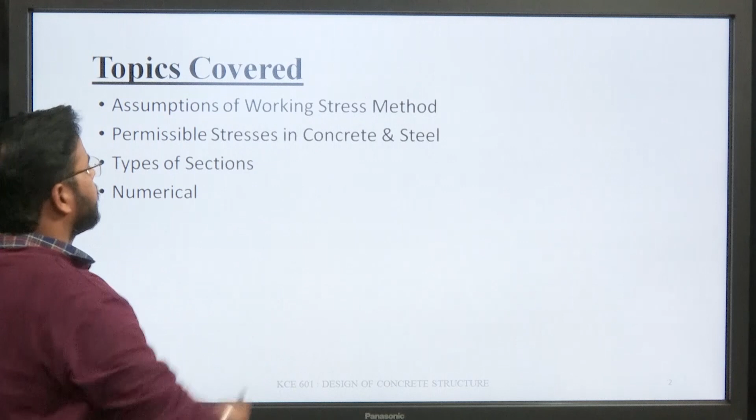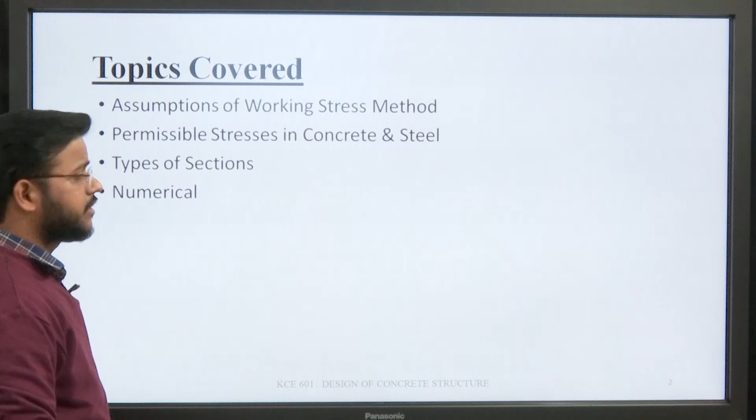In this lecture we are going to cover different assumptions of working stress method, the different permissible values taken for concrete and steel in this design philosophy, the different sections, and then a numerical question related to the analysis of this method.

So the first thing is the different assumptions, or say the rules, related to this design philosophy. This is mentioned in IS code 456 2000, Annexure B.

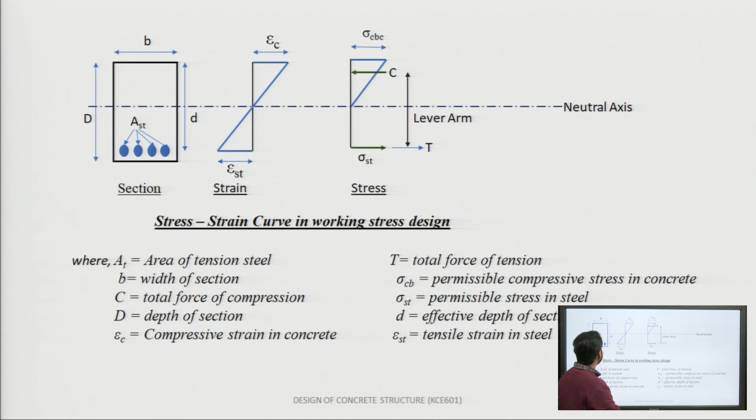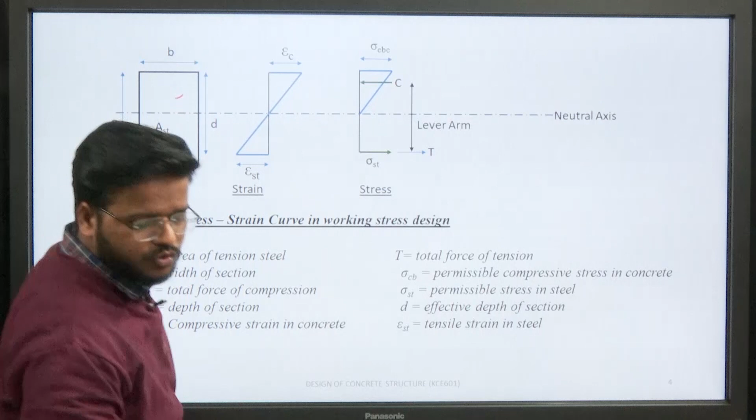The first very important assumption is that a section which is plane before bending remains plane after bending. Let us take a cross section where the width is B and the total depth is D. There is a neutral axis which differentiates the tension zone and compressive zone when a uniformly distributed load is applied on a simply supported beam. The upper part is the compressive zone and the part below the neutral axis is the tension zone.

So basically it means that the strain increases as we go farther from the neutral axis. As we can see from the strain diagram, as we go farther from the neutral axis, the value of strain increases proportionally.

The second very important assumption in working stress method is that the bond between steel and concrete is perfect within the elastic limit of steel, meaning they share the strain value equally.

Now the third important assumption: as you can see from this cross section, there is concrete below the tensile zone also. So the third important assumption is that the tensile strength of concrete is ignored, meaning the concrete will not share any tensile strength below the neutral axis.

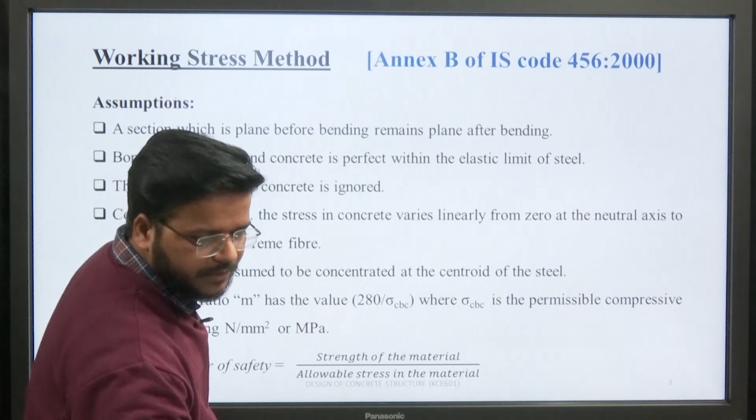The fourth very important assumption is that concrete is elastic, meaning the stress in concrete varies linearly from zero at the neutral axis to a maximum at the extreme fiber. You can see from this figure that the stress directly increases from the neutral axis to its maximum value as we go further to the extreme fiber.

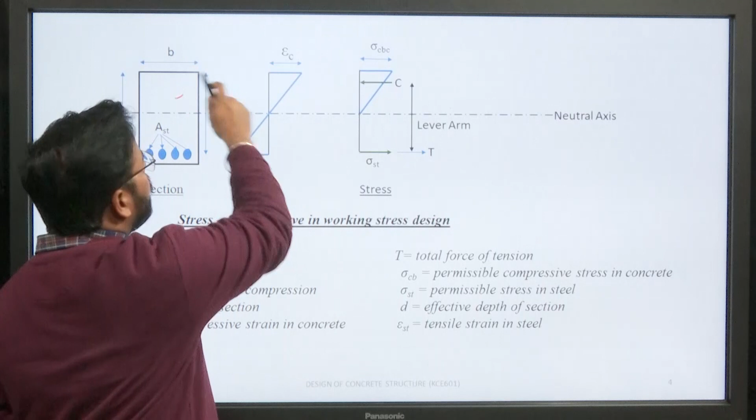So at the extreme fiber the stress in concrete is found, which is equal to sigma CBC. What is sigma CBC? We will discuss that further.

The next assumption is that steel area is assumed to be concentrated at the centroid of the steel. As you can see, the steel section is concentrated, and the stress in this steel is concentrated at the centroid of the steel, that is T. The stress sigma ST is basically at the centroid of the steel.

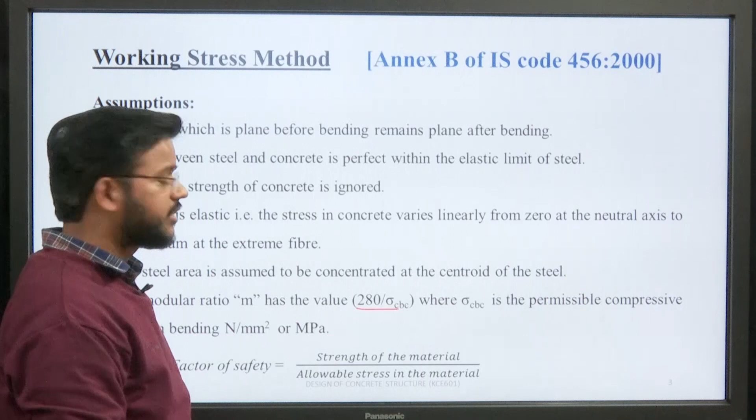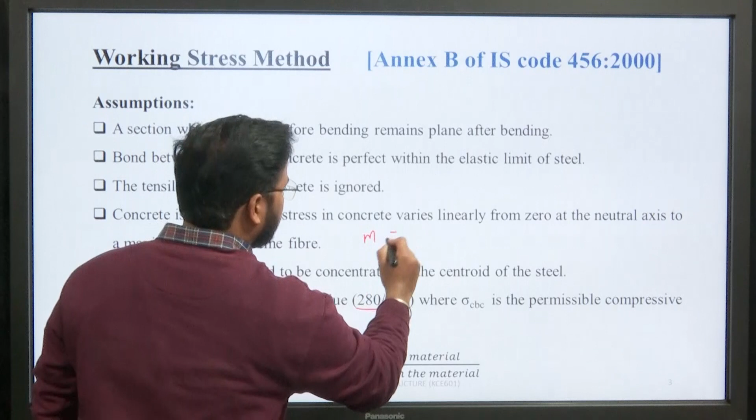And the last assumption taken in this method is that the modular ratio has a value equal to 280 upon sigma CBC, where sigma CBC is the permissible compressive stress in bending in Newton per mm square. Basically the modular ratio is defined as the ratio of the modulus of elasticity of steel to the modulus of elasticity of concrete, meaning M equals ES upon EC.

ES means modulus of elasticity of steel, and its ratio with modulus of elasticity of concrete gives the modular ratio. But as per IS code, the modular ratio is not taken equal to ES by EC; instead it is taken equal to 280 upon 3 sigma CBC.

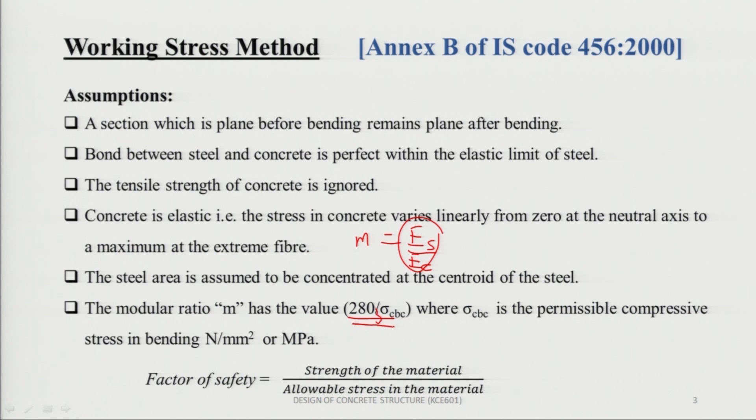So why is this value taken? Because it incorporates the creep effect. The simple ES/EC ratio does not involve the creep effect, whereas this value incorporates the effect of creep.

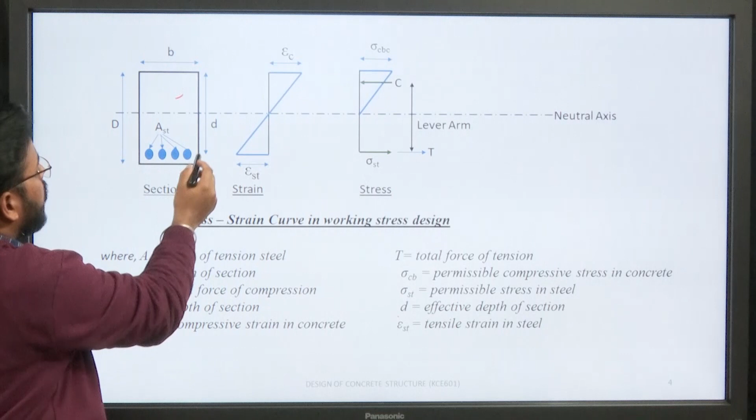So, we already discussed this cross section of a reinforced concrete structure, this is steel, this is the width of the beam and this is total depth. Now the most important term is this d, which is basically called

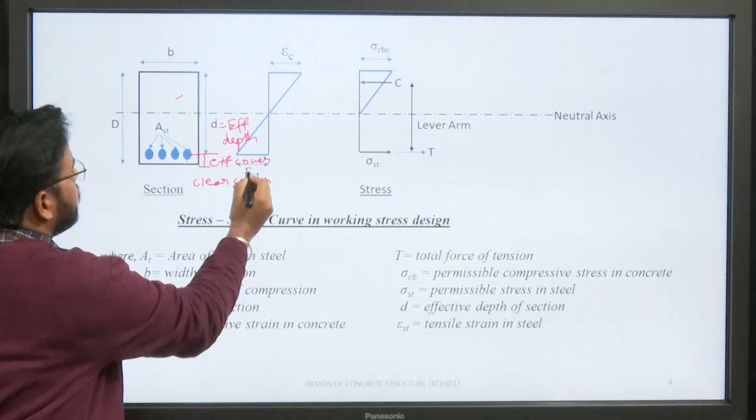effective depth. What is effective depth? The distance from the centroid of the steel to the extreme tension fiber is basically known as effective cover, which is provided, and the distance from the last point of the steel to the last extreme fiber is basically called clear cover. So when we subtract the value of effective cover from capital D, meaning total depth of the cross section of the reinforced concrete structure, then we get the value of small d, which is also known as

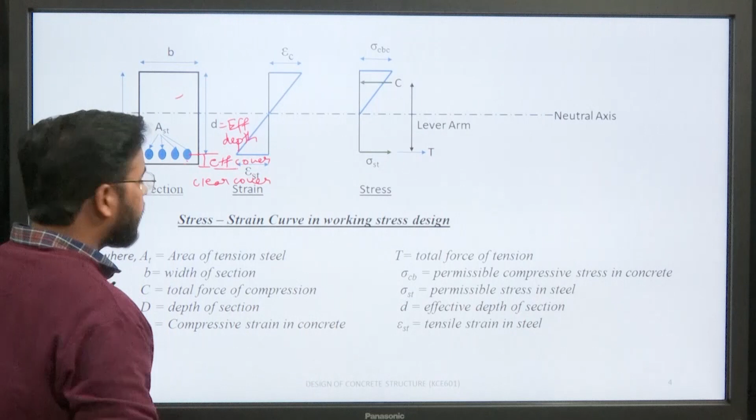effective depth. So we already discussed this strain curve and stress curve from the assumption.

Now what is the permissible stress which concrete will take while it is in tension. It is mentioned in clause B 2.1.1 of IS code 456/2000 that for different grades of concrete, as we discussed in the previous lecture, the permissible tensile strength is given. Like for M10 grade of concrete, the permissible tensile strength is 1.2.

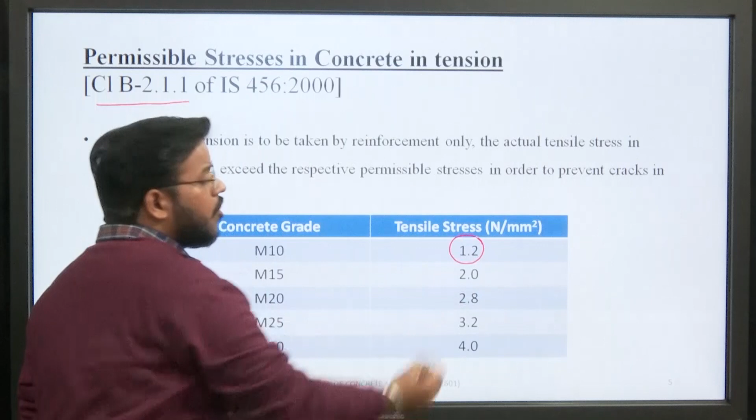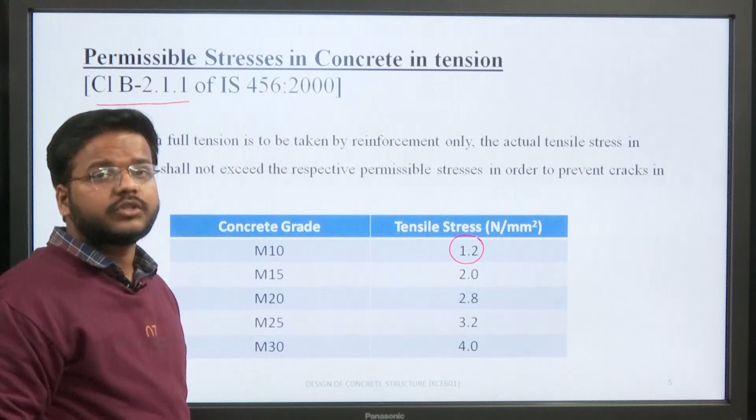Although it is mentioned that concrete will not take any type of tensile stress, in general some tension is always present. So it should not happen that a crack develops, because concrete is very weak in tension and very strong in compression. If tensile strength exceeds this value, there may be a possibility that a crack is generated at that place. So this value is given so that the tensile stress in concrete should not exceed these values for different grades of concrete.

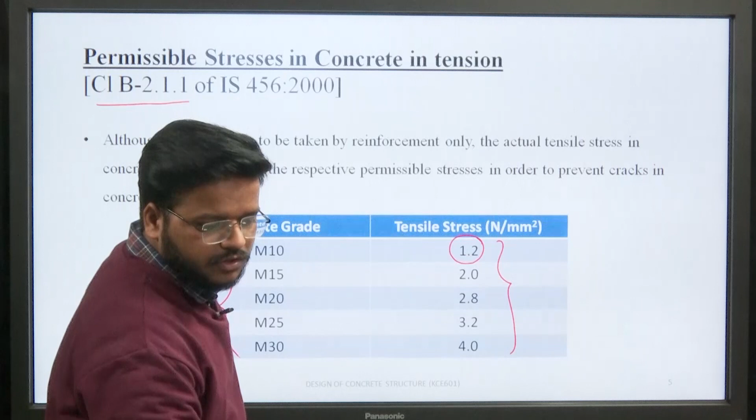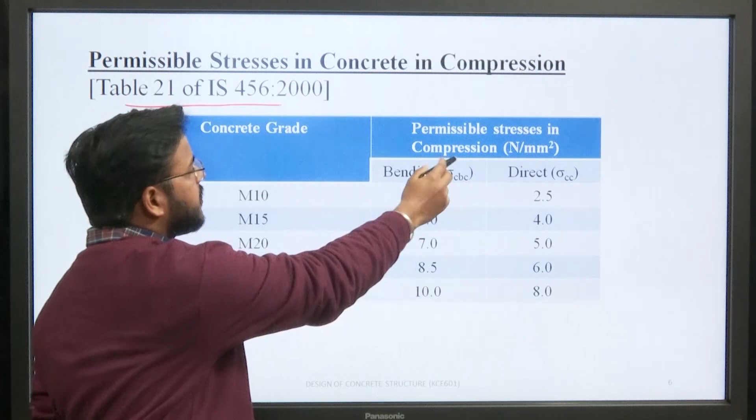Now the permissible stress in concrete in compression is also mentioned in table 21 of IS code 456/2000. For different grades of concrete, you can see the permissible stresses in compression. So when the concrete structure is in compression, there are two types of loading seen: the first one is bending and the second one is direct.

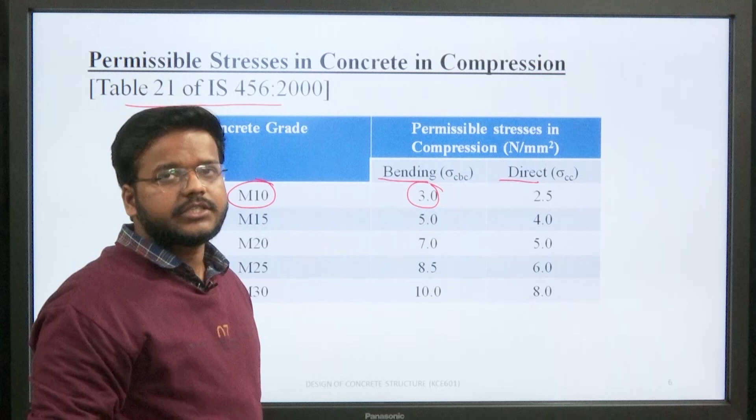Bending stress is represented as sigma CBC and direct stress is represented as sigma CC. So for M10 grade, the permissible bending stress in concrete in compression is equal to 3 Newton per mm square, while for direct stress its value is 2.5.

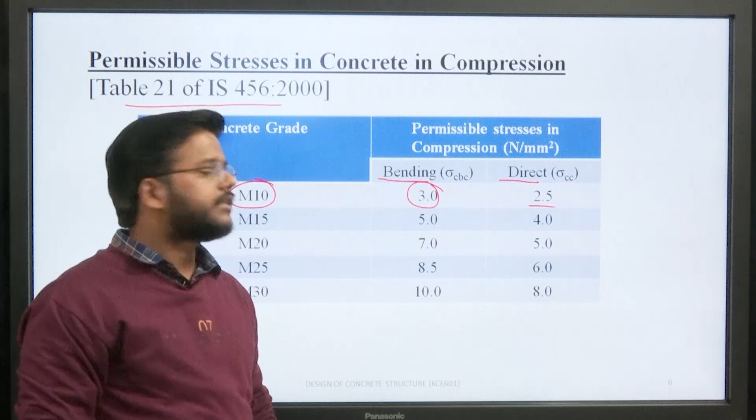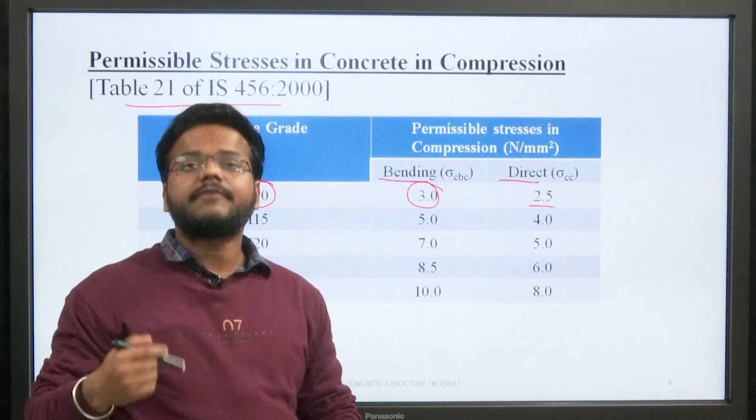You can see that the permissible stress in direct loading is basically low compared to bending, because when you apply direct force, it becomes more weak. So this value is basically low when compared to the bending.

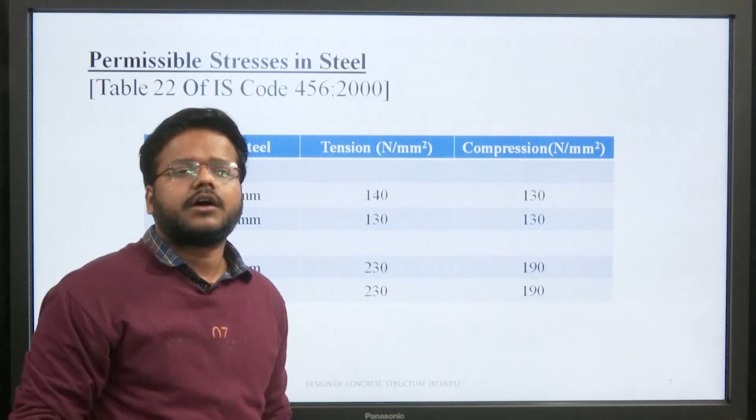So till now we have discussed the permissible stresses in concrete, in compression and in tension. Now we discuss the permissible stresses in steel. It is taken from table 22 of IS code 456/2000, showing what are the permissible stresses in steel.

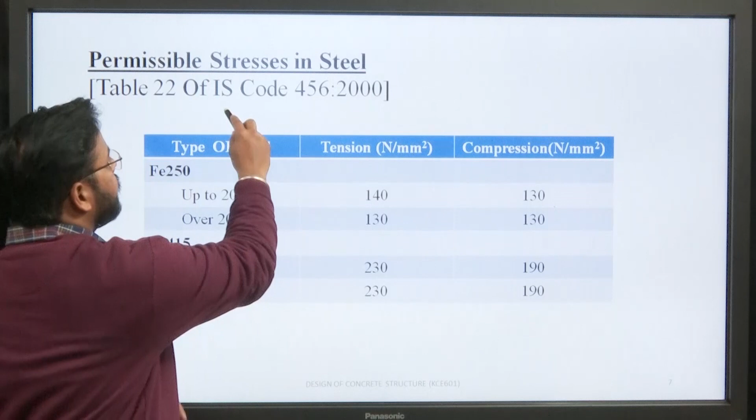So for different grades of steel up to different dia, like up to 20 mm dia bar, we can take the permissible stress in tension as equal to 140 Newton per mm square, and for 415 grade of steel up to 20 mm, this value equals 230 Newton per mm square.

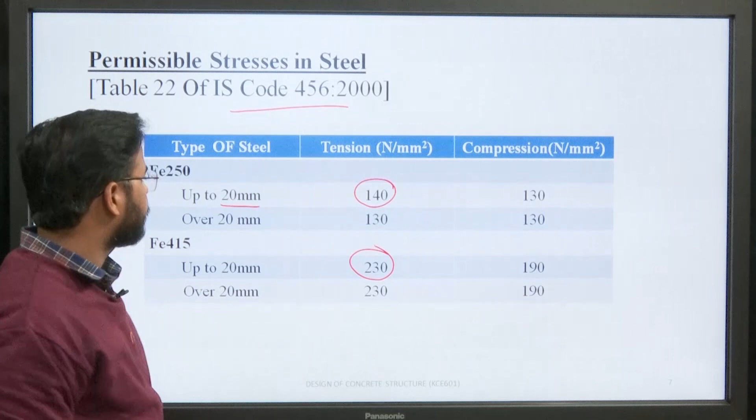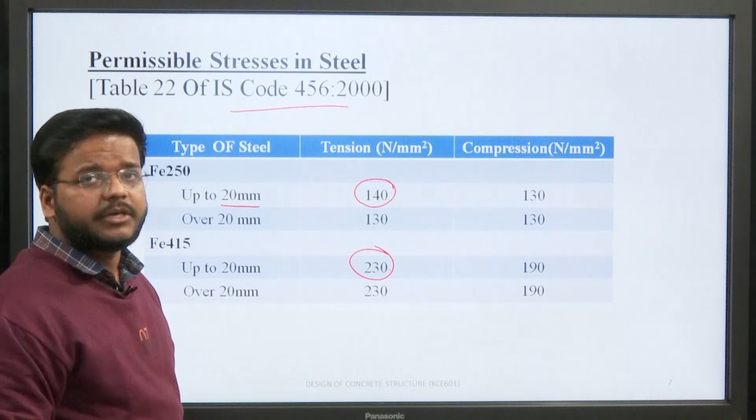These are also important values, but for your subject reference, these two values are very much important, so remember this. Generally these basic values are also mentioned in questions, but you should also remember these values.

Now the modular ratio is a very important term, which is basically used during analysis of reinforced concrete structure in the working stress method.

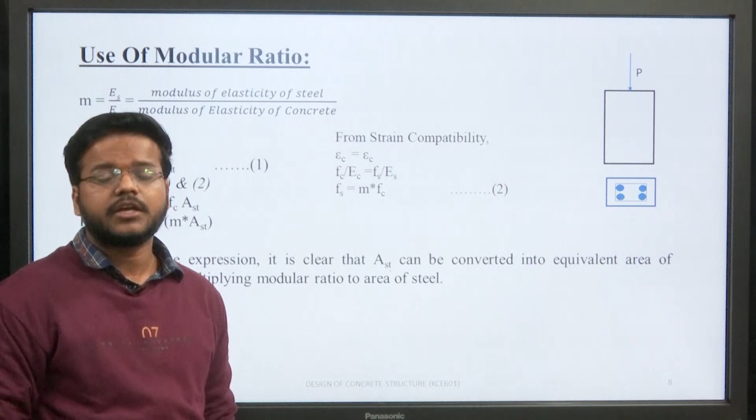So you can see a section where a load P is applied. This load is basically borne by both the concrete and steel. We can write the load as stress into area of concrete, plus stress in steel into area of steel. So this is one section.

From strain compatibility, you know that εs is equal to εc, meaning the strain in concrete is basically equal to the strain in steel. So here you find that Fs is basically equal to m into Fc. M is basically the modular ratio, which is the ratio of modulus of elasticity of steel upon modulus of elasticity of concrete.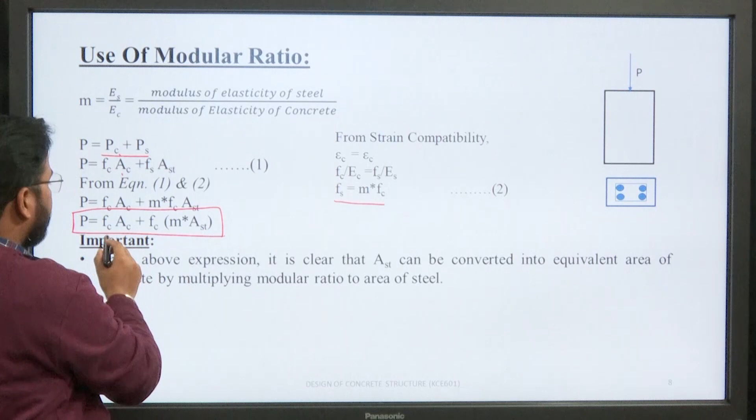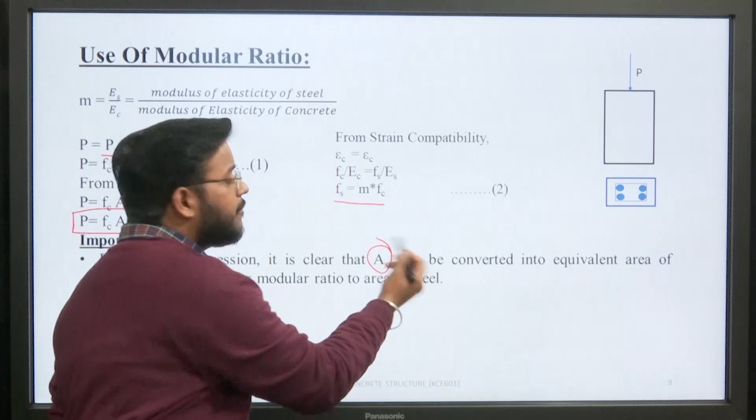So from the first and second equations, when we substitute, we find that P is basically equal to stress in concrete into area of concrete, plus stress in concrete into modular ratio into AST. From this equation we find that the area of steel can be converted into an equivalent area of concrete by multiplying the modular ratio with the area of steel. This is basically used when we do the analysis part.

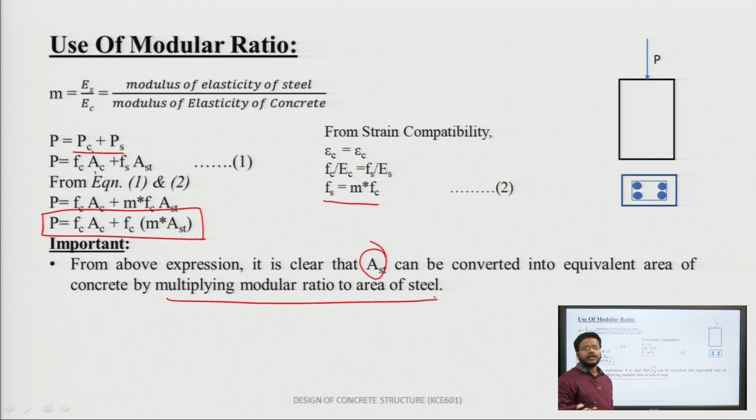In this analysis part, we are going to convert the area of steel into the equivalent area of concrete, so that the analysis becomes easy for us. Now, how do we actually do the analysis of a singly reinforced section?

First, understand what singly reinforced section means. As discussed earlier, above the neutral axis there is a compressive zone and below the neutral axis there is a tensile zone. When steel is placed only in the tensile zone, it is referred to as a singly reinforced section. If we put steel in both the tensile and compressive zones, it becomes a doubly reinforced section. We will discuss that further.

Now, as before, we can convert the area of steel into an equivalent area of concrete by multiplying it by m. Here the concrete is shown dotted because concrete has no strength in the tensile zone, so it is neglected, as per our assumptions. The area of steel (AST) is converted to the equivalent area of concrete.

So we can analyze the moment by the area of the compressive zone. The area of the compressive zone is equal to B into XA, where XA tells us the position of the neutral axis. So the area of the compressive zone is B into XA, and the moment arm at the neutral axis will be XA by 2, measured from there to there. So the moment is B into XA into XA by 2.

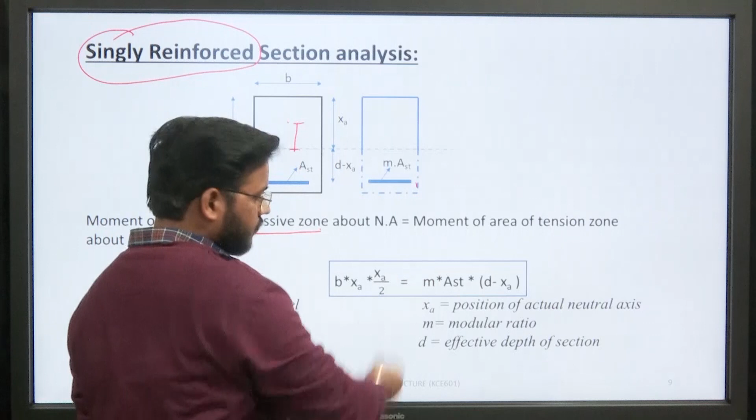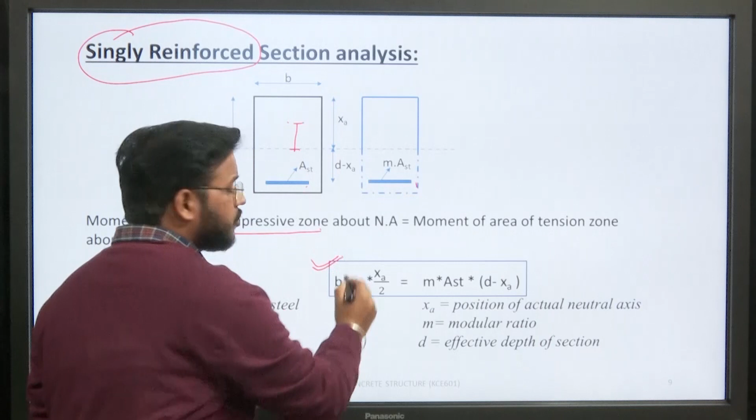Now, the area of steel equivalent to concrete, m into AST, acts with a moment arm of D minus XA, because from there to the steel it is equal to the effective depth D. So this total value equals D, this is XA, and this value equals D minus XA. This is a very important equation used for finding the position of the neutral axis in different types of sections. Note it down.

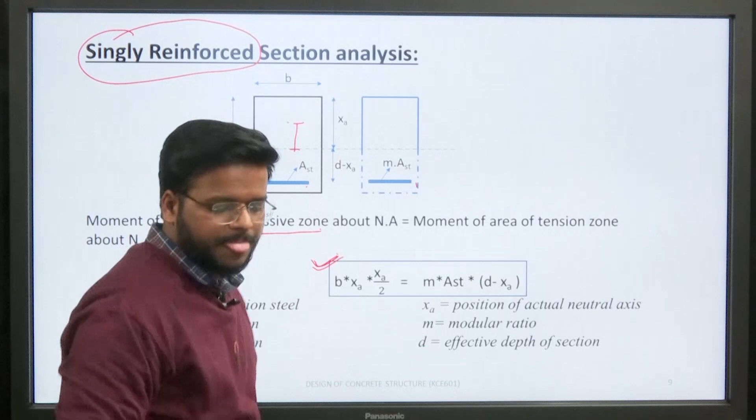Now, what are the different types of sections we see in the working stress method of design? The first type of section is the balanced type of section. What is a balanced type of section?

Basically, if a member is so proportioned that the maximum stresses in both the concrete and the reinforcing steel reach their permissible values at the same time, then the section is termed a balanced section. This means the maximum permissible stress in concrete and the maximum permissible stress in steel both reach their maximum limits at the same time.

Then the position of the neutral axis of this balanced section is referred to as the critical neutral axis, represented as xc, where c stands for critical.

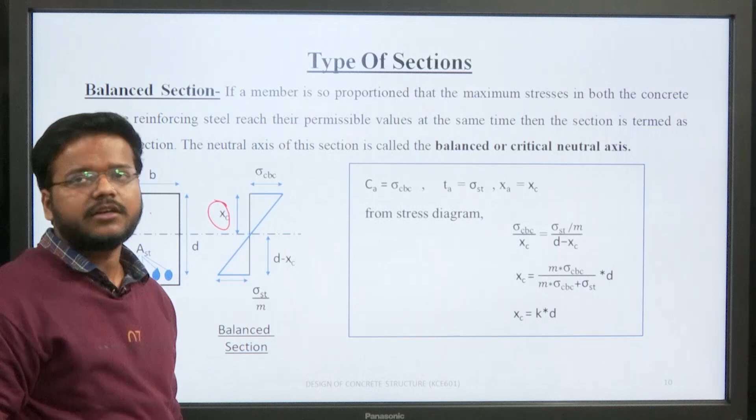So this is the stress diagram. You can see previously there was a stress diagram only in the compressive zone, and here a line representing stress in steel, but now we convert the stress in steel to be equivalent to the concrete section, which is why it is divided by m. So this is the stress diagram.

From the stress diagram we can see the extreme value at the concrete fiber equals sigma CBC, while the extreme stress in steel equals sigma ST, and the position of the neutral axis is the critical neutral axis. From the stress diagram we can assume sigma CBC upon XC equals sigma ST upon m, divided by d minus XC.

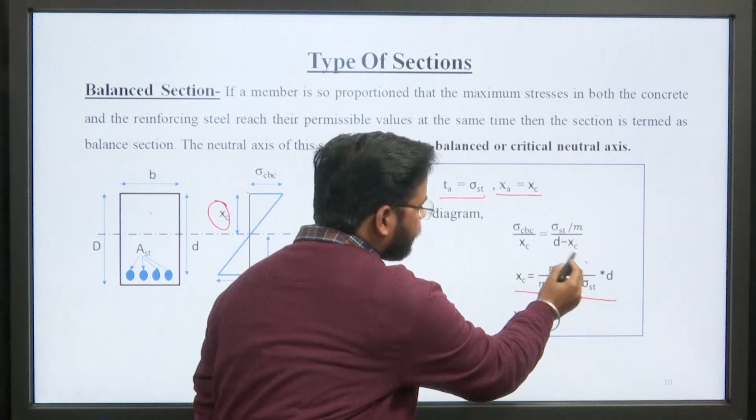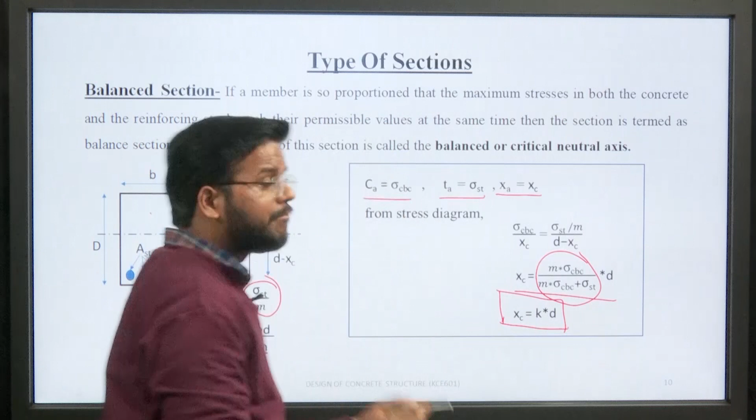So you can find the position of the critical neutral axis from this equation. This whole expression is written as K, a factor used to calculate the position of the neutral axis, only in a balanced section. We are talking here specifically about the balanced section.

Now, the next type of section is the under-reinforced section. If there is a lesser amount of steel relative to the compressive strength of concrete, meaning the maximum permissible stresses in steel are generated before the maximum permissible stress in concrete, then this type of section is called an under-reinforced section. It means the maximum stress generated in steel equals sigma ST, but the maximum permissible stress is still not generated at the extreme fiber of concrete, equal to sigma CBC.

It is basically less than sigma CBC. That type of section is basically termed as under reinforced section. Generally the benefit of this type of section design is that the maximum permissible limit reaches in steel first, that means the steel reaches its maximum stress limit. So it will fail further if we apply load further.

You know that steel is ductile in nature, so its failure means the failure is in ductile nature, which gives a proper indication, proper warning before failing. That is why we actually prefer to design an under reinforced section, because if any kind of failure is seen, it will be ductile, meaning you get at least a warning before its failure. So generally we try to design an under reinforced section.

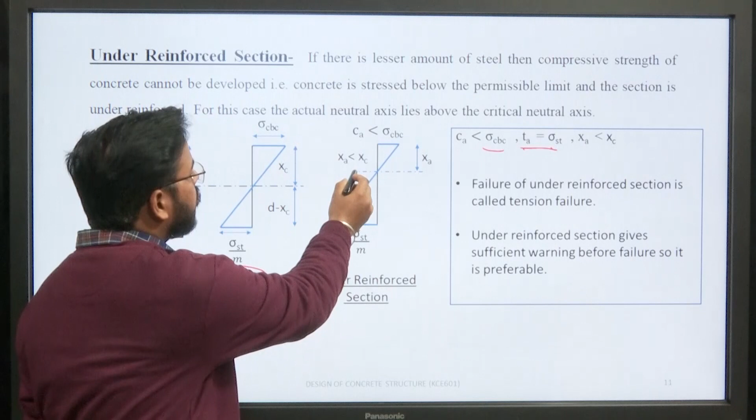About the position of neutral axis: compared to the balanced section, in the under reinforced section, the position of neutral axis is less than the critical neutral axis. This is also used for analysis or finding an under reinforced section. So when you find the position of neutral axis is less than the critical neutral axis, it will be termed as an under reinforced section, and the failure of this type of section is actually tension failure, which is very preferable.

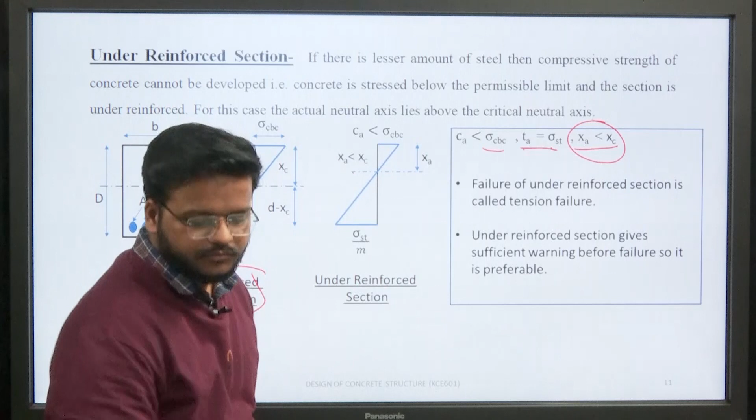The next very important section is the over reinforced section, meaning when the permissible stresses in concrete reach their limit value first, compared to the maximum permissible limit in tension, the concrete is going to fail. This type of section is basically termed as over reinforced section. Here the maximum permissible limit first reaches in concrete, meaning the maximum permissible limit is equal to sigma CBC.

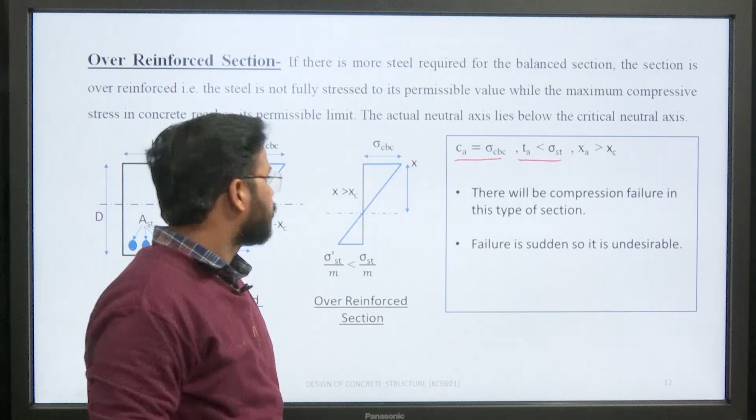But the stresses in steel still haven't reached their maximum permissible value, meaning the stresses in steel are still less than sigma ST. Here you can find the position of neutral axis is below the critical neutral axis, meaning the position of neutral axis is lower than the critical neutral axis. But in this type of section, the permissible limit reaches in concrete first, so the concrete will fail if any kind of loading exceeds.

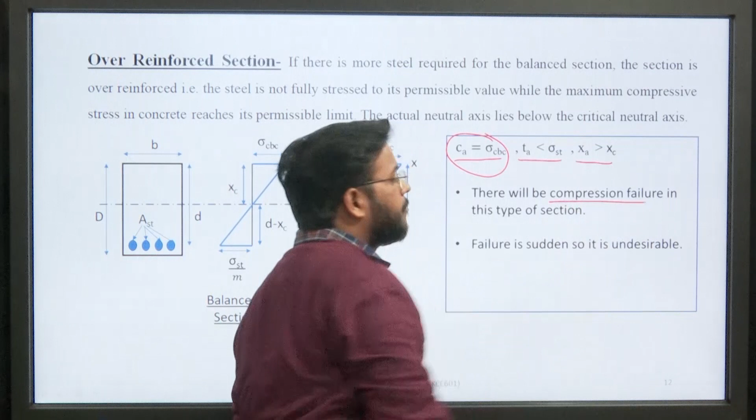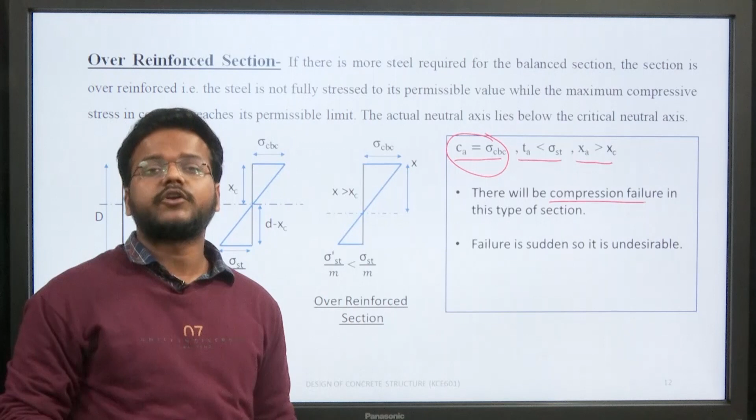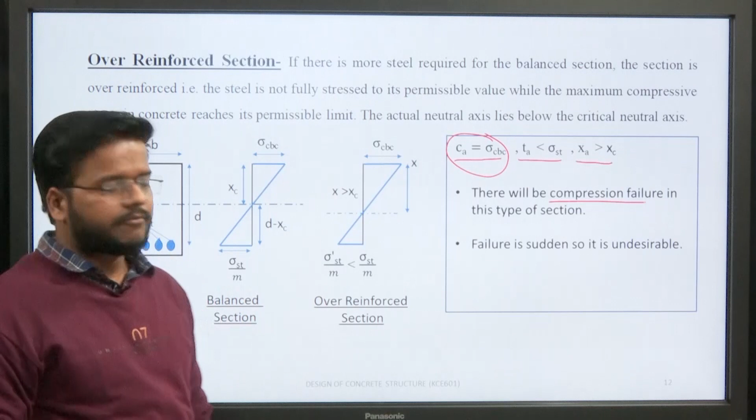This type of section is basically because concrete is brittle in nature. So in this type of section we generally see a compression failure or brittle failure, meaning concrete will fail first before the steel fails. So we generally try to avoid designing this type of section, because if you design it and it fails, the concrete fails first and it will be dangerous for the people living under that concrete structure. That's why we actually try to avoid designing this type of over reinforced section.

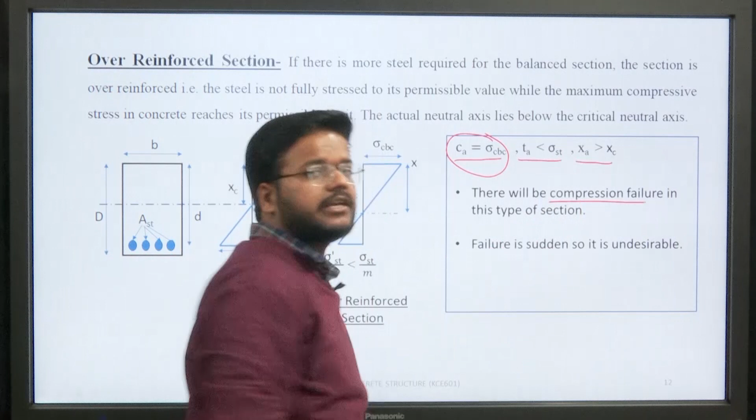So how do we recognize that this is an over reinforced section? When the position of neutral axis basically exceeds the value of the critical neutral axis. Now, the moment of resistance of a section is an important term which is basically used to calculate the resistance of the concrete structure.

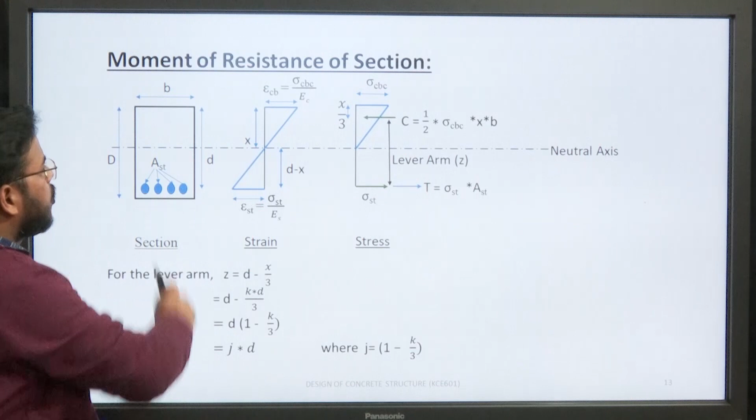So how do we find it? First, there is a cross section whose width is B and total depth is D, effective depth is small d, and the total area of steel is equal to AST. This is the strain diagram, and this is the stress diagram, which we will see further.

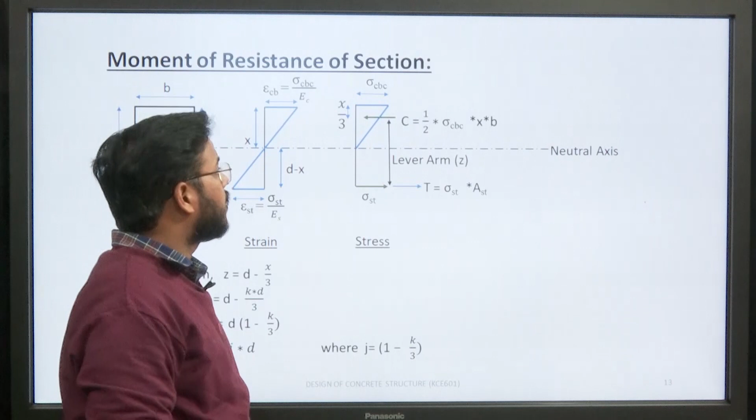Now for the calculation of moment of resistance: you know that moment of resistance is basically equal to force into distance. Here there are two forces, two types of stresses acting. The first is the compressive stress acting in the concrete compressive zone, and the second is the stress acting on the steel. This is the tension force, calculated by stress into the area of steel, that is sigma st into AST.

The second important force is the compressive force, acting in the concrete zone, which is equal to half sigma CBC into x into B. It is calculated by taking the area of the triangle, or taking an average like 0 plus sigma CBC divided by 2, into x, into the unit area B into 1. From this you can find the value of the compressive force.

So basically, the distance between the line of action of these two forces denotes a value which is called the lever arm. Lever arm z is equal to d minus x by 3, meaning the total distance is d, the effective depth, and the compressive force acts at the centroid of this triangle, which is at x by 3 from the top fiber. So the total distance d minus x by 3 basically gives you the lever arm.

You can also write it as d is equal to... just a second.

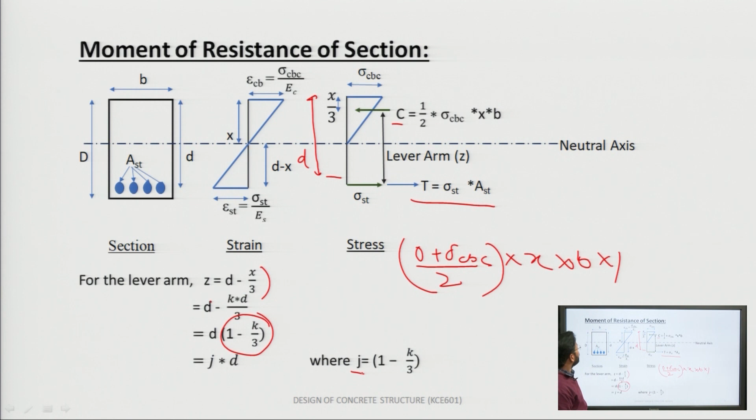You can also write z is equal to d minus k into d by 3. X is also can be written as k into the multiples of d. Okay, we have already seen it previously. Now d can also be written as 1 minus k by 3, and this whole term can be represented as j.

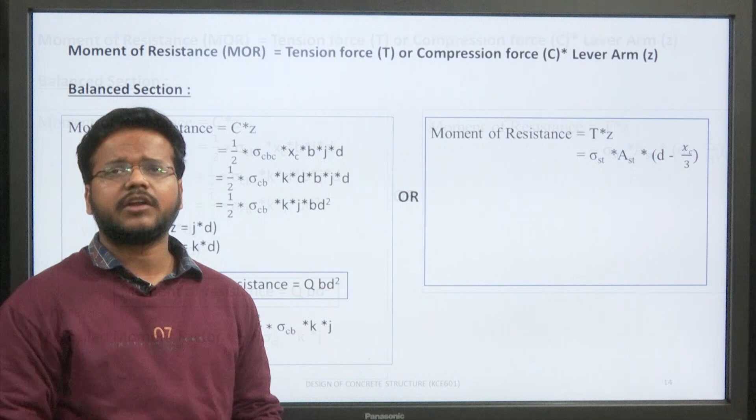So you can calculate the compressive forces. Now the moment, as we already discussed, is basically equal to the tension force or compression force multiplied by the lever arm. So for the balanced section, we can take any one of the forces and multiply it by the lever arm value.

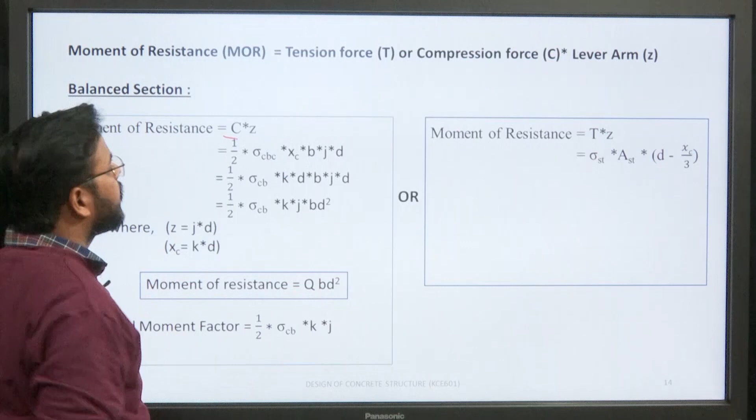We have already seen that the moment value is half sigma CBC into XC into B into J into D. This can also be written as half sigma CBC, with XC as K into D, and B into J into D, giving half into sigma CBC into K into J into BD square. This whole term can be represented as the moment factor, Q, where Q is equal to half sigma CBC into K into J.

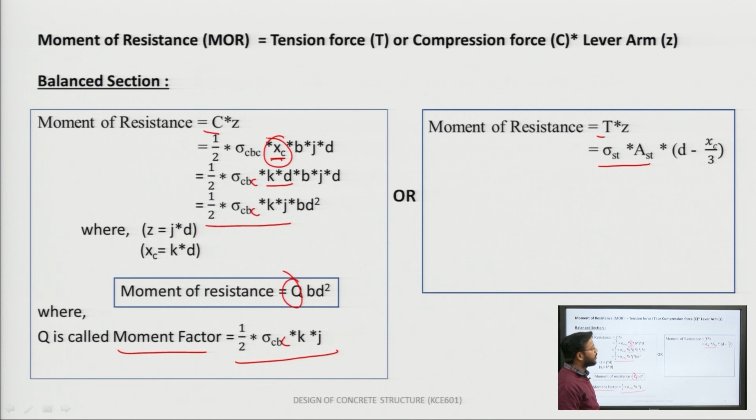So the moment of resistance, QBD square, is calculated using the compressive force only. Now the moment of resistance can also be calculated using the tension force into the lever arm. The tension force equals sigma st into Ast, and the lever arm is d minus xc by 3. Note that here we use the position of the critical neutral axis, since it is a balanced section, for calculating the moment of resistance.

Now the second type of section we already discussed is the under-reinforced section, where the failure is basically in the steel. So we calculate the moment of resistance from tensile force into lever arm: sigma st into Ast into d minus xa by 3. Here you should note that the position of neutral axis used is not equal to the critical neutral axis.

We have to calculate the actual neutral axis by equating the area of the compressive zone and taking moments at the neutral axis. So from this formula we can calculate the moment of resistance in the under-reinforced section.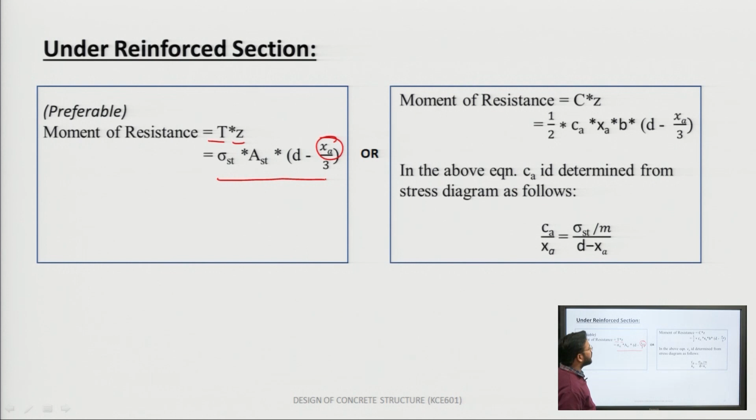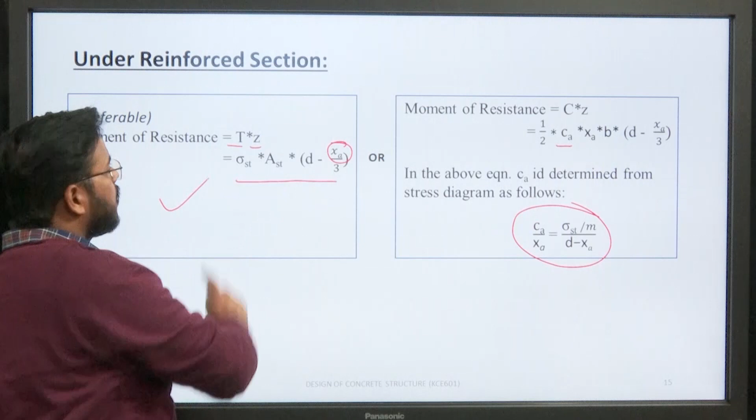We can also calculate the moment of resistance using the compressive force, but we try to avoid this because the value of Ca, the compressive force, is not equal to sigma CBC. We have to calculate it from the stress diagram, which means one more equation is added, increasing the calculation. That's why we prefer the tensile force equation for the under-reinforced section.

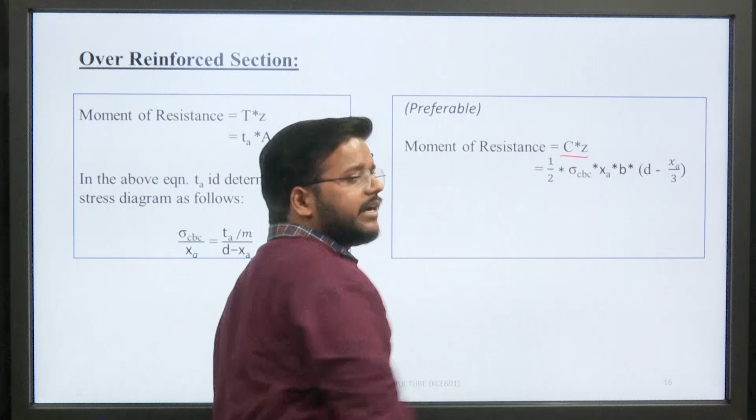Likewise, for the over-reinforced section, we earlier saw that failure occurs due to compressive force, meaning the concrete fails in this type of section. So for this moment of resistance, we use the compressive force and lever arm for the calculation, and try to avoid the use of tensile force and lever arm.

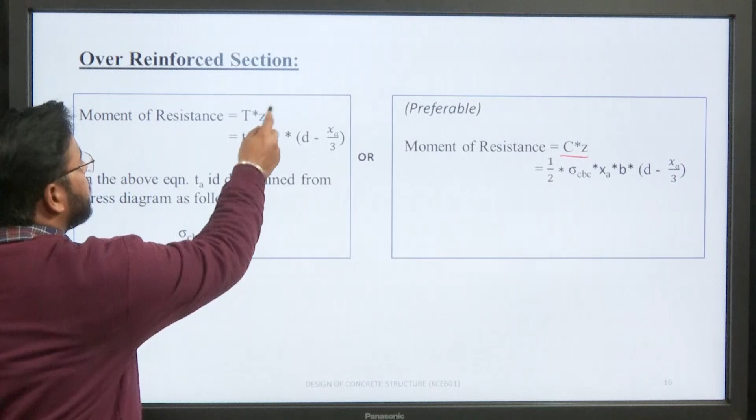But we can also calculate it using tensile force and lever arm, though we have to find Ta, which is not equal to sigma st, because it is going to fail in compression, meaning in concrete. The stress coming in tension will be less than sigma st, so we have to calculate this Ta value before using this formula for moment of resistance in the over-reinforced section. This equation is basically derived from the stress diagram shown in the previous slides.

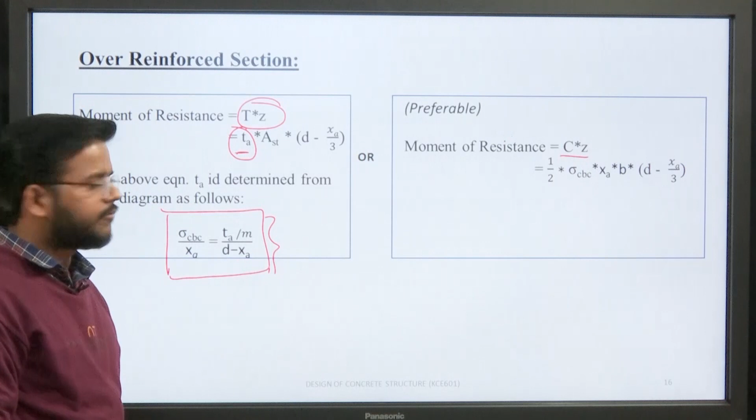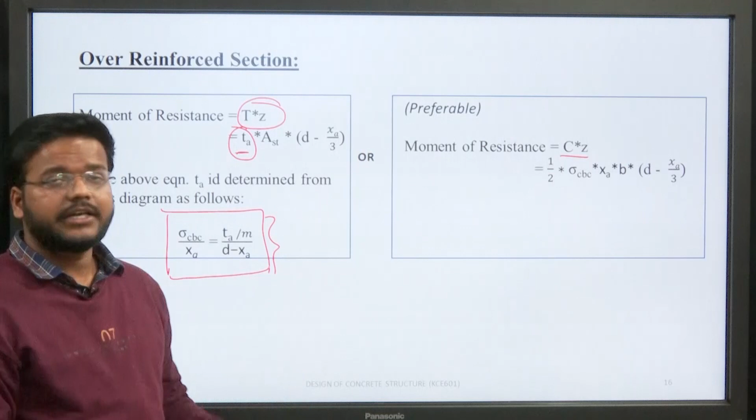So till now we have found how to decide which type of section it is, and how to calculate the moment of resistance in different types of sections. Further analysis and numerical questions we will discuss in the next lecture. Okay, thank you.